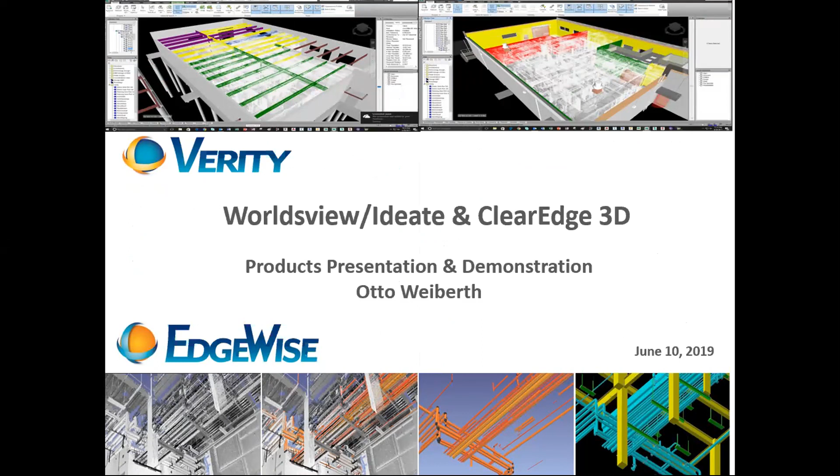Just one quick note, talking about technology. I don't know if you know this or not, but the F-16, we're talking about jets, the F-16 could fly faster going straight up than the F-4 can flying straight down. So imagine if you're sitting in an aircraft using the F-4 and you've got the F-16. So technology really becomes a big advantage.

So a little bit about ClearEdge. We're going to talk very briefly about the company, an overview, and then we're going to split the presentations into two, Edgewise and Verity, followed by a demonstration of each one.

So ClearEdge was founded in 2006 by experts in automated feature extraction. What that means is that we've been doing automation since 2006. So we truly are the pioneers. We've been doing it longer than anybody else. We have the most algorithms in automation. We are a subsidiary of Topcon, which is a $1 billion company. So we definitely have staying power. If you could hit next, please.

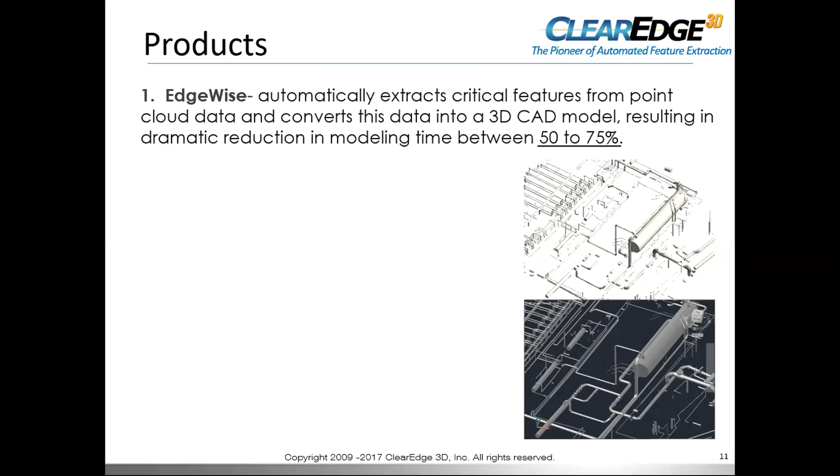Our products are typically considered an investment as opposed to an expense because there's a very fast payback. Edgewise automatically extracts critical features from your point cloud data and converts it automatically into a 3D CAD model that will reduce your modeling time by 50 to 75%.

It's easy to use. It's compatible with all terrestrial scanners, and you can easily integrate with Revit and various CAD programs. The workflow is here: you scan, you register with whatever software you're using for registration, then you use Edgewise to process it, and then you can export the 3D model that Edgewise extracts into various CAD or Revit software.

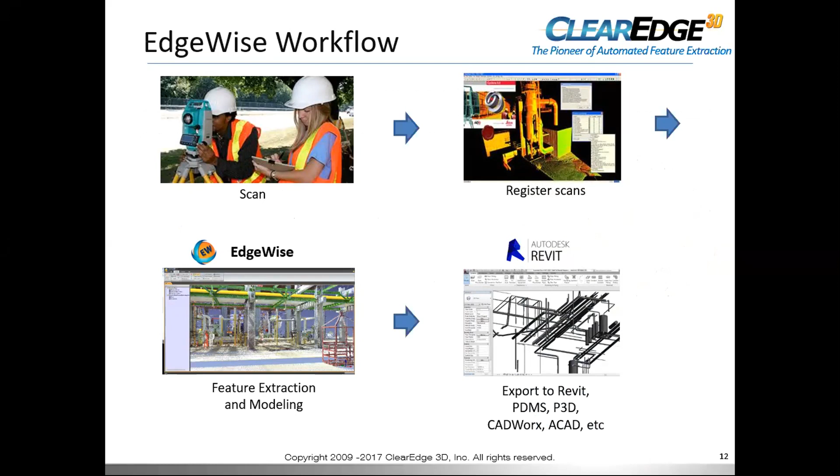On the Verity side, we'll get into that after the Edgewise, but Verity is a construction verification software, and it analyzes point clouds of your as-built installed construction against the design fabrication model. So basically what it's doing is it's looking at the two and it's showing you any items that are out of tolerance, and it's giving you a heat map so you could very quickly see it, as well as tabular data. So it's very effective.

It's a companion to Navisworks, so if you have Navisworks, it works with it. And the key factor is it can verify 100% of your work in the same time it takes today for contractors to spot check a small percentage of the project.

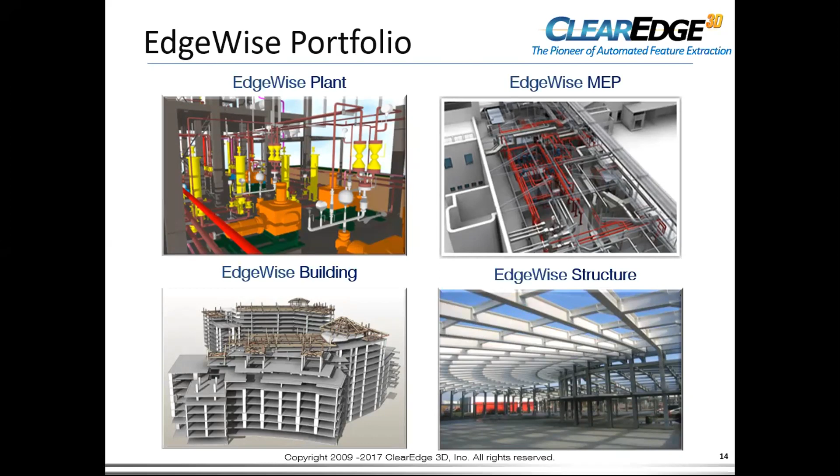Getting back to Edgewise, this is our portfolio, 4 modules. The building structure is pretty obvious. The difference between Plant and MEP, they have similar functionality. Plant is for the different CAD programs, and MEP is specifically for Revit.

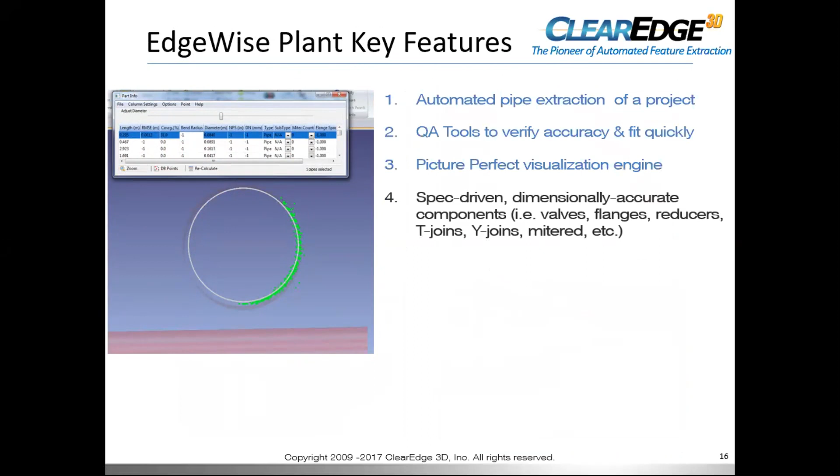On the plant side, it automates pipe extraction of a project. We have phenomenal quality assurance tools, so you can very quickly verify what was extracted automatically. We've got a picture-perfect visualization engine, which we'll show you. The software is spec-driven, so everything that you place in the software has dimensionally correct, accurate information. You could easily create custom specs because the software sits in a spreadsheet.

Next. We have both automatic and semi-automatic pipe editing tools, and our Smart Sheet technology allows you to add intelligence to every single pipe run. And that intelligent model, you could export to various CAD programs.

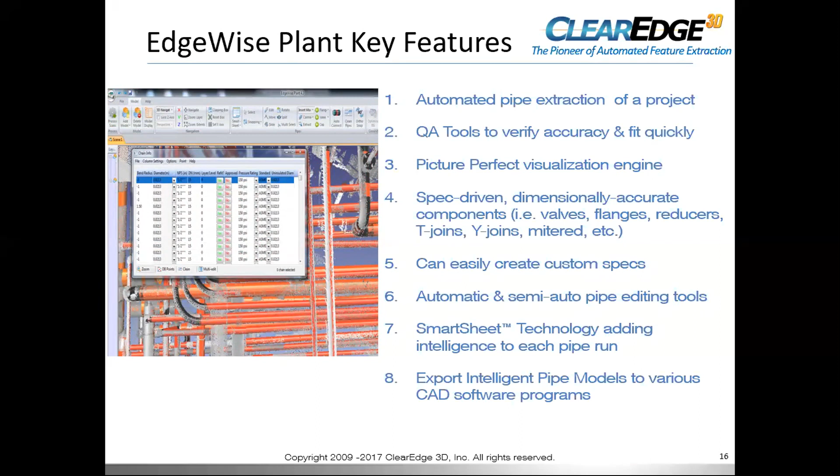And the CAD programs that we support today are CADWorx from Intergraph, Plant 3D from AutoCAD, AVEVA's PDMS, AutoPlant, which is a Bentley program, and then we have the generic Revit, AutoCAD, as well as MicroStation. So those are the plugins that we support.

A little bit about the savings. Here's a project that was done in Algeria, a large refinery, and I brought refinery because I know some of the countries have some large refineries. This one was a $2.6 billion upgrade. It was done in 3 phases. The documentation was either outdated or missing.

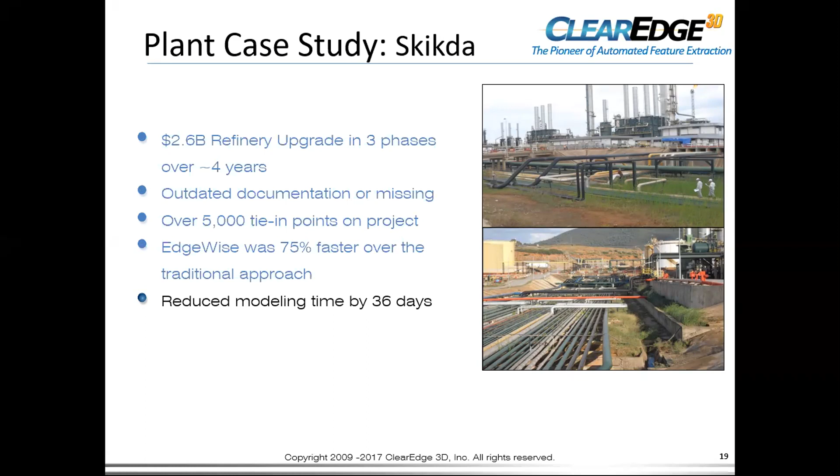It represented over 5,000 tie-in points, and because it was done in 3 phases, they had a comparison. Phase 1 and 2 were done traditionally. Phase 3 was done using Edgewise, and they found Edgewise was 75% faster than the traditional approach. In essence, it reduced modeling time by 36 days, which was substantial. If you put man hours against that, it's quite a sum of money that was saved.

It was a successful win-win project because our contractor, next please, our contractor actually reduced his modeling man hours by 75%, and the client saved 36 days of project schedule. So they got the contractors off site 36 days sooner.

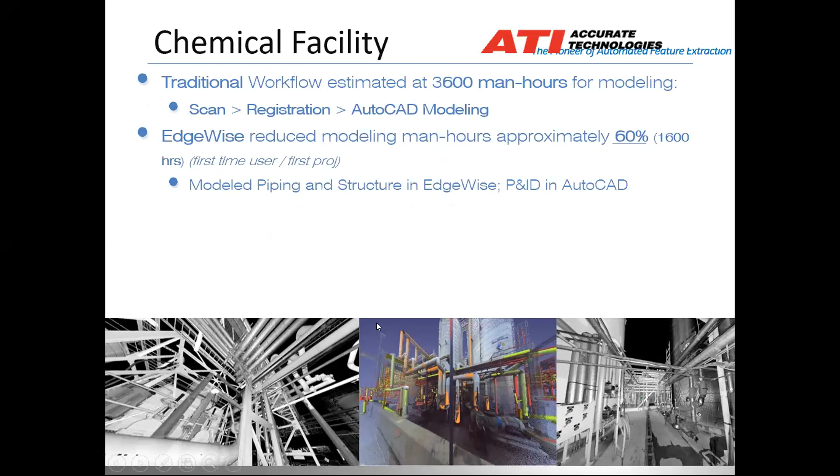Okay, next. They estimated 3,600 man hours for scan registration and the modeling itself. What Edgewise did was it reduced the man hours by 60%. So basically that 3,600 became 1,600, and they completed the modeling of the piping and the structure in Edgewise and a P&ID in AutoCAD. So that is a 2,000 man-hour savings, which is considerable on this project. So you could imagine how happy the client was. Next.

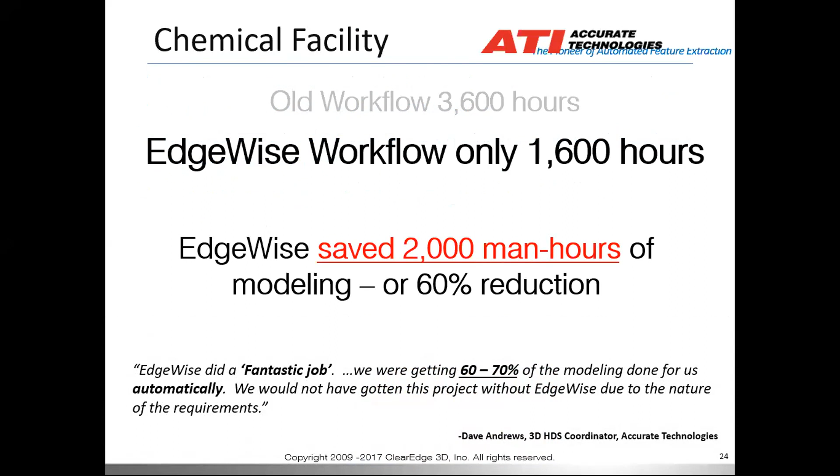On the MEP side, next. It's very similar to the plant, except it's specifically made for Revit. Okay, you could go through this. We do have a case study next, where we'd like to show you some of the metrics.

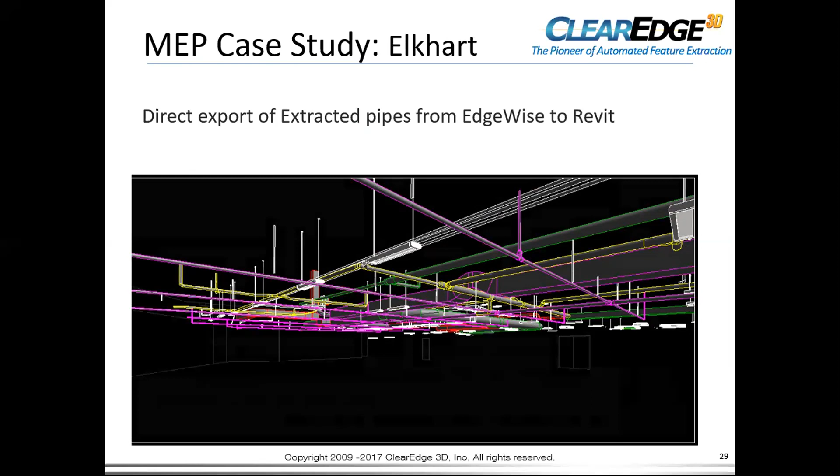Next, it was a win-win outcome because our client that did the scanning and modeling reduced his man hours by 75%. The hospital was extremely happy because they got contractors out of the hospital 11 weeks sooner. So it was truly a win-win.

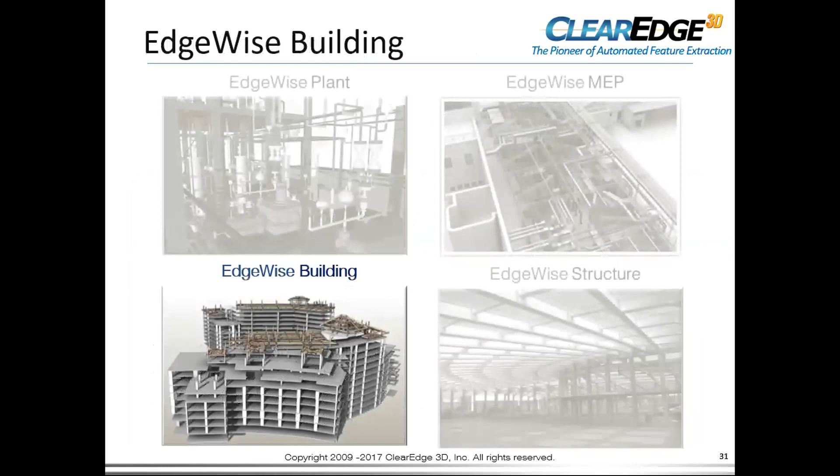On the building side, next. We automatically extract walls and windows, and we directly export to Revit as Revit family objects. And we're getting exact as-built walls as opposed to as-designed walls. And you'll see we've got a really nice QA program so you can see how the walls line up.

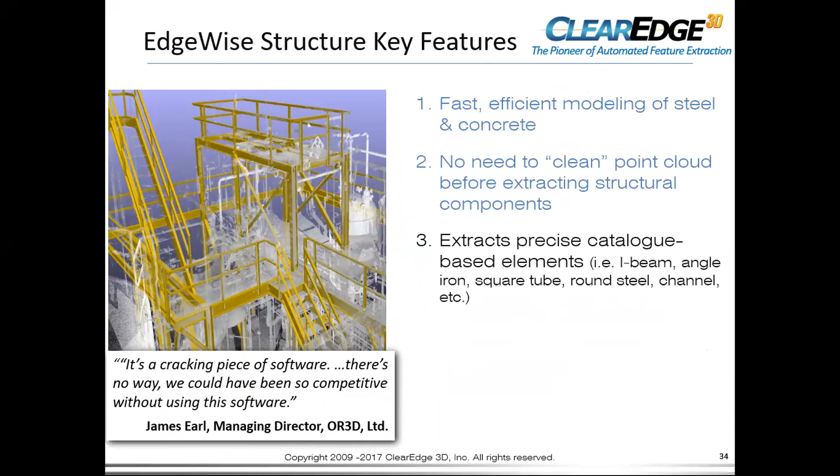Next. On the structural side, we actually can extract steel and concrete. And you don't need to clean the point cloud at all in order to extract because we're extracting from a catalog. So everything comes out of a catalog when it's extracting the steel. Next.

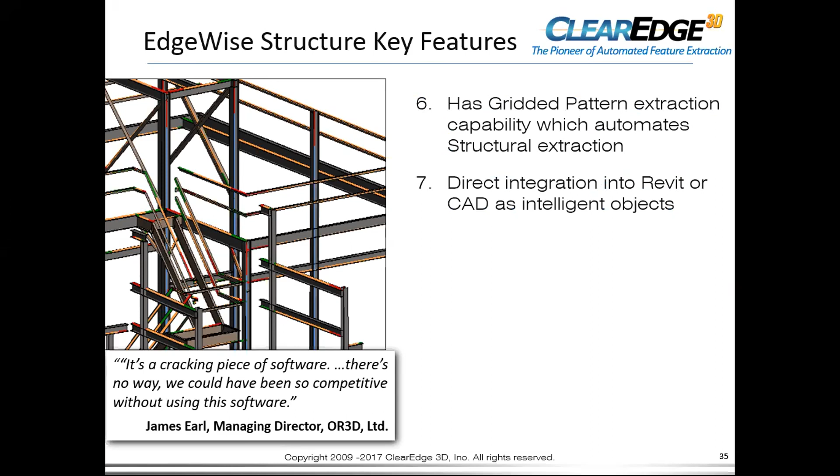We have a very good QA system and editing tools, which we've gotten a lot of feedback from clients on how well it works, and we'll show you how that works. You can very quickly see how the two line up: the point cloud that was a scan and what was extracted out of the catalog. We also have a gridded pattern extraction, which automates structural extraction. And again, we have direct integration into either Revit or one of the CAD programs.

In this case, I'd like to turn it over to Trevor. And before we get into Verity, Trevor's going to take us through a demo of Edgewise. So again, if you have questions, now's the time to ask on anything I presented. If not, you could also ask questions as we go through the demo. So with this, I'll turn it over to Trevor. And while we're turning it over, does anybody have any questions?

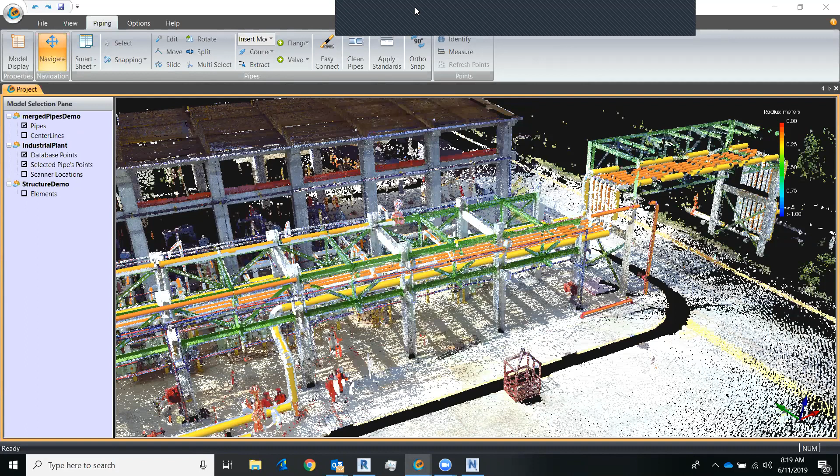All right, Trevor? So first things first, a little bit about what I have up on screen. This project right here is about 20 scan setups. All I've done to this point is I took my registered scan files, brought those into Edgewise, told Edgewise to go through, create my point cloud, and also go through and extract my pipes. So if I turn off my point cloud, all the pipes that you're going to be seeing up on screen here in a second, this is all automatically generated.

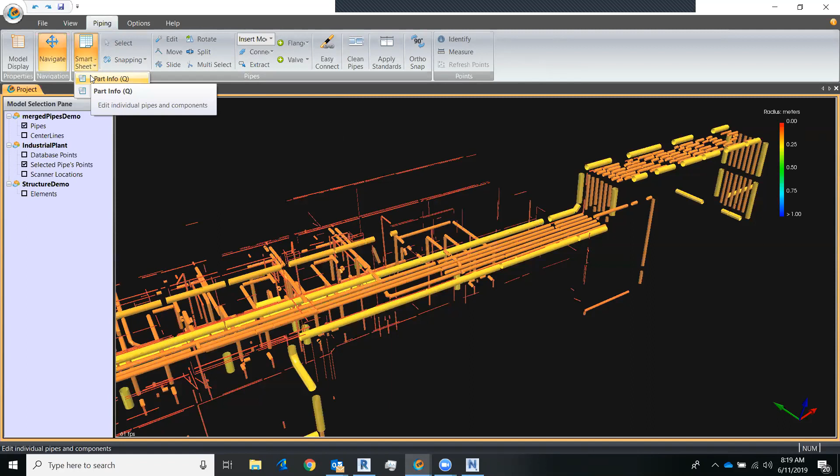So this is with no human effort whatsoever. This is the software finding them right off the bat from the point cloud. So this is going to be the starting point of my workflow, or my 0 man-hour mark. So the first thing I want to talk about today is going to be the QA/QC tools. For that, we put a lot of time and effort into developing some pretty awesome ones, mainly our part info spreadsheet, which is an intelligent spreadsheet that links my numerical data back to my visual model.

Coming back to that concept of QA, I have the QA mode. Inside the QA mode, I have the bore of the extracted pipe in kind of this teal/green, or I have the bore of the extracted pipe in gray, and then I have all the points used to extract that pipe in this teal/green. So this way I can quickly go through and visually do an inspection of my pipes, see how they're fitting to the point cloud.

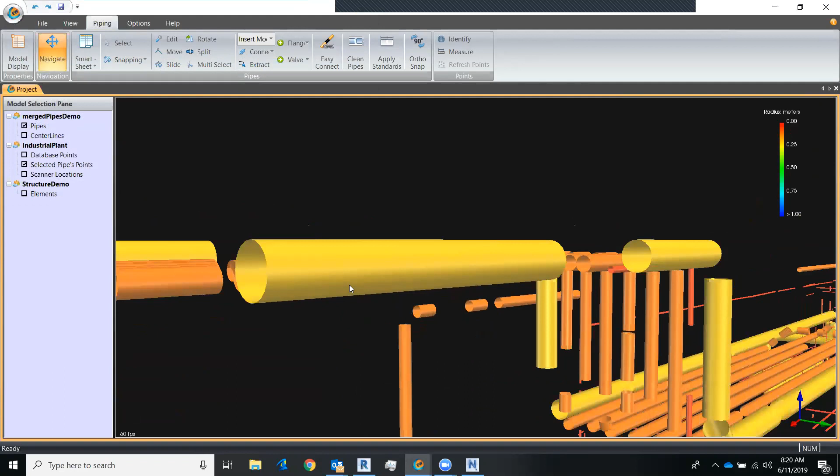If I see anything that I don't like, I can simply hit the delete key on the keyboard and I'll delete that pipe from my visual model. The next thing I'll go ahead and talk about is gaps. So for example, if I come over here and turn on my point cloud, we can see we had these structural support pieces of steel, and they blocked the scan coverage of the pipes behind them. And without any scan coverage, Edgewise simply does not know a pipe should be there.

So instead of having to go through and do these connections one by one manually, what I have is the Easy Connect tool. And the Easy Connect tool is where Edgewise will automatically go through and insert both straight connections as well as elbows. So there you can see in black, that's everything that it just did right there. That was live, and that's how long it took.

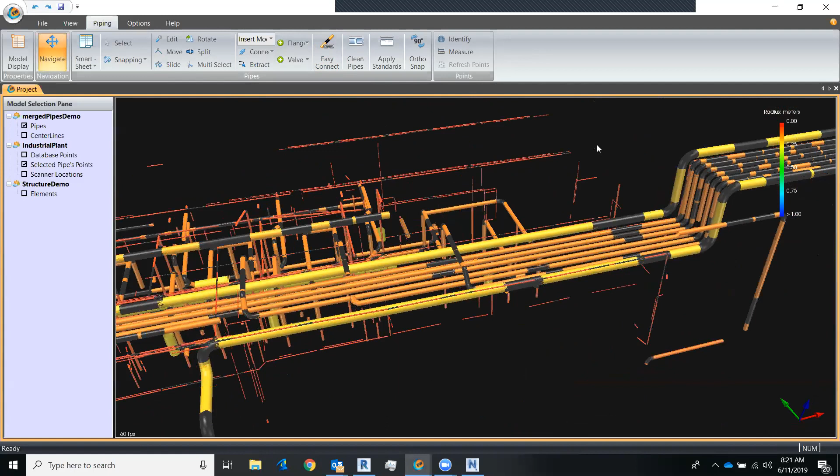So besides the automated tools, there is a whole host of semi-automated tools for inserting straight connections as well as doing pipes in a more manual way. But just in the interest of time, I'm going to go ahead and skip those. So coming back to more of the automated tools, another of the unique tools in the Edgewise software is going to be this one right here, the Clean Pipes tool.

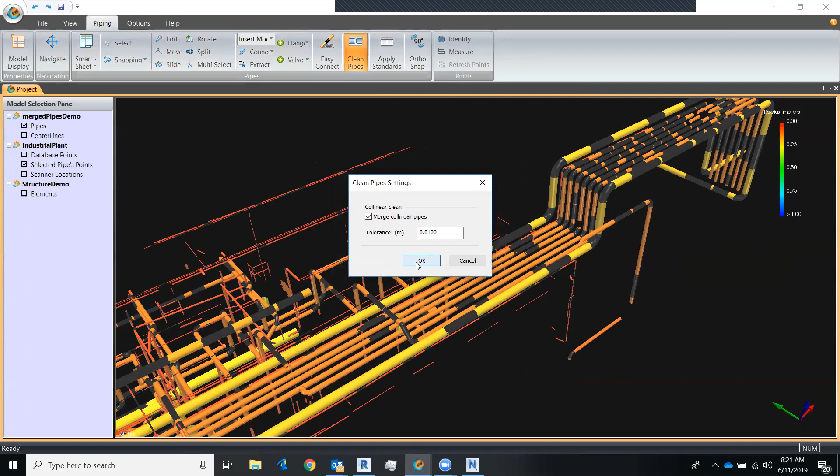So the Clean Pipes tool is incredibly important because it does two main things to my model. It'll convert these black straight connections and turn those into true pipe, and also gives me the ability to control how as-built or how as-designed my model will be. What I mean by that is I can choose to either make more straight perfect pipes, or I can have the option to make a pipe that more accurately reflects the as-built condition.

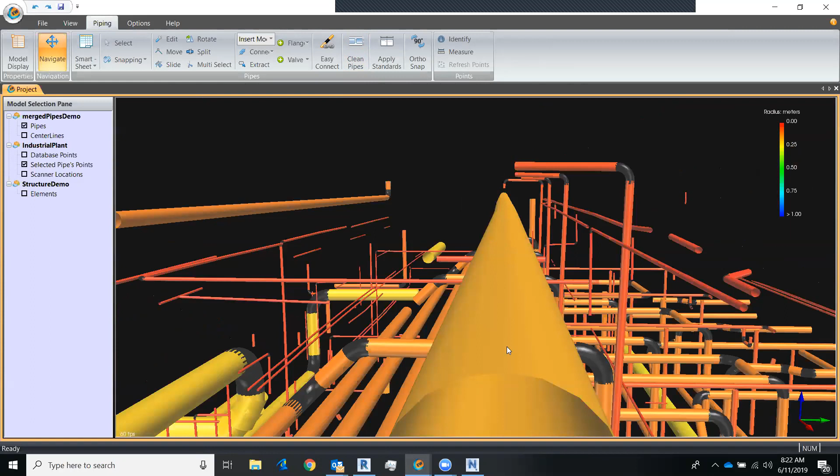It might be a little bit hard to see, but if you look around this pipe right here, you can see it meanders a little bit to the left. It kind of swings back to the right. So again, my as-built conditions like the sags and deviations are being captured in my model. And as I mentioned, I have the ability to either straighten that back out, or I can have it capture more reality, completely dependent on the needs of the project.

So the next thing we'll go ahead and talk about is applying a standard to the model. For that, right here, we have this pipe standard editor. I'll just go ahead and click on, say, my ASME spec at 150 PSI, and there you can see all the different values contained for my pipes, my flanges in the center, and all the way to the right, my different valves. The reason I point this out is I have the option to export this out as a CSV file that I can bring into Excel and use as a template to create my own custom spec for use in the Edgewise software.

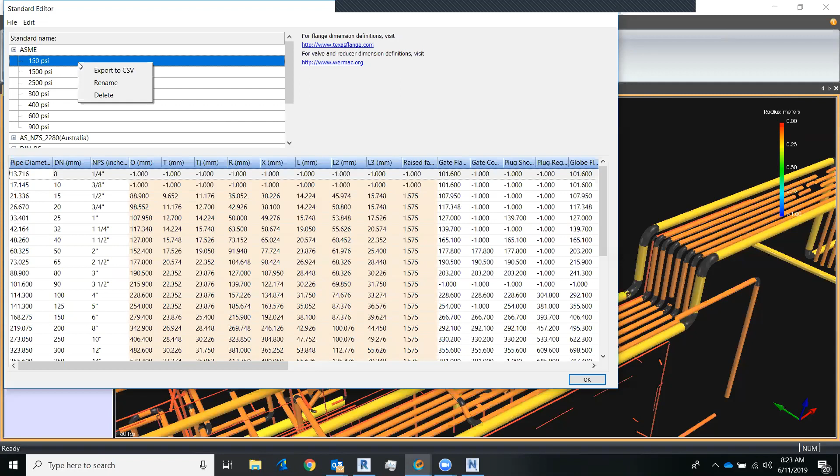Speaking of that, I can apply a standard to my model in one of two ways. There is a global option that will allow me to apply a standard to the model globally, as well as an option to do it by pipe run or for groups of pipe runs. I'm going to show it mainly as a global operation, and that's going to be the Apply Standards tool right here. So I'll go ahead and click that. I'll just go with my ASME spec at 150 PSI, click OK. There's a slight shift in the models. Now Edgewise takes the diameter that I found from the scan data and matches that up to the closest standard spec diameter.

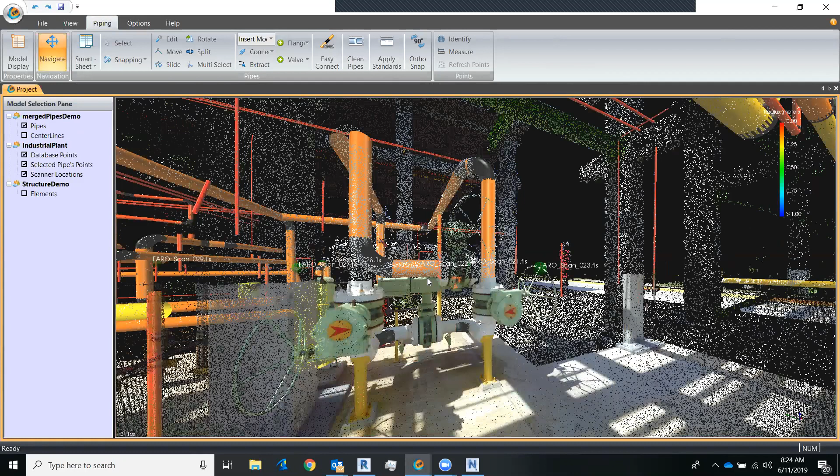So now that I have my standard applied, this is where we can go ahead and talk a little bit about components. And one of the key tools I have for my components is going to be something called ClearView. ClearView is a photorealistic rendering of the point cloud from a scanner view. So if I hop into one of my little scanner orbs and turn on my point cloud, you'll see I'll be presented with this kind of HD photo view.

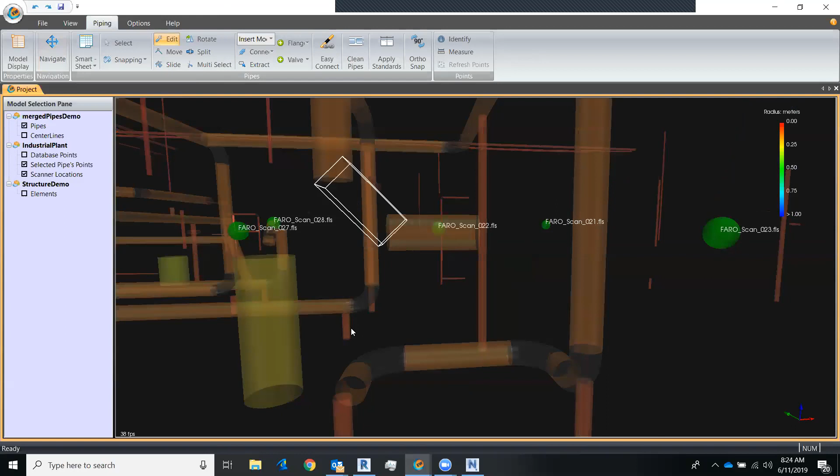So the key thing is this is all a point cloud, meaning all of the modeling I have shown and will show I can do from this view. And this is one of the most important tools I have for my component placement. So I'm just going to go ahead, clean up this little section right here. I'm going to use some of my semi-automated tools.

There you can see I'm inserting elbows. I'll put some T-joints over here on the left and right. And now I'll go ahead and place some components. Before that, we have two big drop-down menus, a list of all the various components inside the Edgewise software. So I'm quite literally just going to choose a flange gate at random, and that's going to be a click and drop. So I'll turn my point cloud back on, left click and place along the pipe.

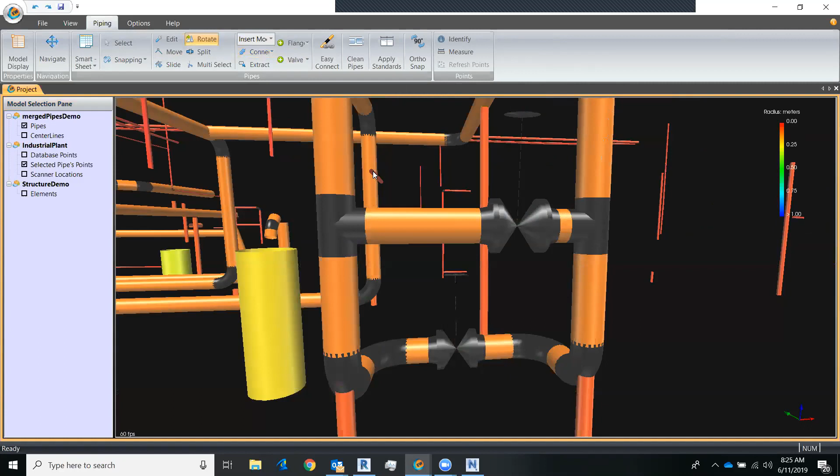There you can see I now have my valves in place. Once I do that, I then have this rotate tool where I can left click and drag, rotate these around, and again, visually fit them to the point cloud. So that is component placement. Again, click and drop it over to the point cloud.

Right. Now I'll go ahead and get out of my ClearView, and let's go ahead and talk about the last thing, which is going to be the chain info spreadsheet. So the chain info spreadsheet right here allows me to manage the intelligence relating to my full pipe run, including diameter information, any layers and levels if I was going into AutoCAD, as well as pressure rating and standard information, and the

Revit families. So if we're focusing a little bit on a Revit workflow, when I export from Edgewise into Revit, I can choose one of 3 families. I can go pipe, conduit, and duct. So this will ensure it'll come into Revit under that correct family database. I also have a multi-edit tool down there at the bottom.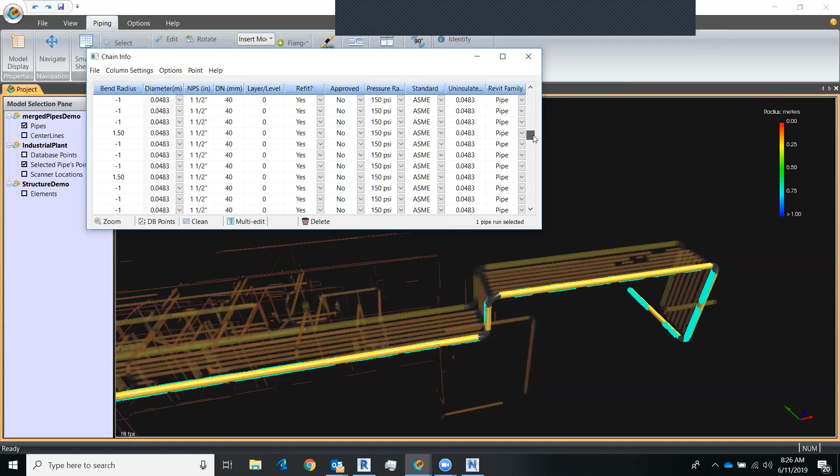Multi-edit does exactly what the name says, and I could say, group select a bunch of these little guys. So I'm going to go ahead and grab everything below 40 mil. You can see it's highlighted in the background. I'll then go multi-edit, go to my Revit families, go to conduit, and now this will all change over to Revit family conduit here in a second. And so again, this will ensure it'll come into Revit under that correct family database.

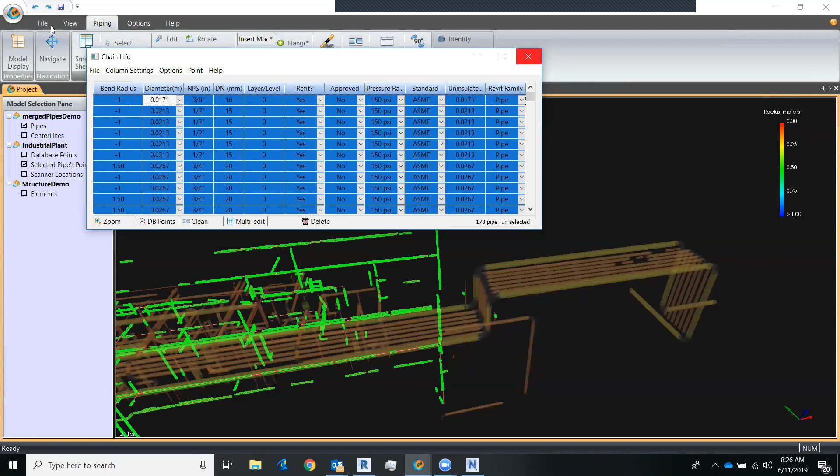So speaking of the last bit, which is going to be the exports. So there's a couple different exports. We're going into the various CAD applications as well as going into Revit. So for going into programs like Plant 3D, as well as CADWorx, we do have intelligent exports. And that's going to be right here. So we offer a couple more intelligent formats.

Additionally to the geometry, there is also a couple point cloud exports. So this one right here, this is the remainder cloud. The remainder cloud is unique, and that is an export of all the remaining point cloud data that still needs to be modeled outside of the Edgewise software. That way you're not having to deal with the information you've already worked with, but you can purely deal with the data that still needs to be worked with inside of, say, Revit.

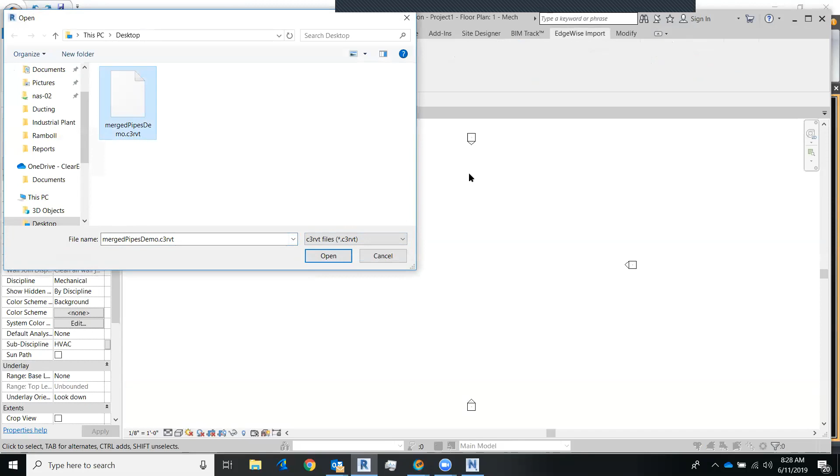So for Revit, I'm going to pop this out. We actually have our own custom plugin. And so just like with all the other things with the Edgewise software, when I pop this out from Edgewise into Revit, it'll all come in as true Revit family objects with all the intelligence behind it. So I'll go ahead, inside of Revit, I just have a brand new project open, and I'll import this in, and so everything will come in from Edgewise into Revit.

Also, the other thing to mention is the coordinate system. Edgewise will use and export all geometry to whatever coordinates are assigned in the registration process. So that was my model, my different disciplines. I can bring those into Revit, one on top of the other, and then everything will come in correctly aligned inside of Revit.

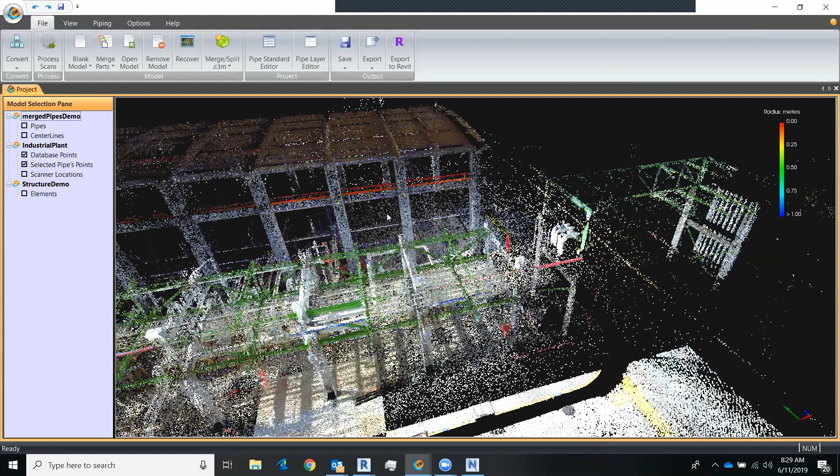And that is a kind of a crash course, if you will, in the piping side of things. So next up, we have the structural steel. The structural steel operates off of a little bit different of an engine, and that engine is object detection. So what that means from a practical standpoint is the automation, instead of happening at the beginning of my process, more happens towards the end.

So I've already created a couple little structural steel elements. I'll kind of talk a little bit about how I got to that point. So the centerpiece is this extraction tool right here. Works exactly the same as with the pipe, and I can draw a box around my element and then Edgewise pull it out. Unique to structure is these 3 drop-down menus right here.

First one is the catalog. These are all the different steel catalogs we have contained inside the Edgewise software, as well as there's catalogs for doing, say, concrete and wood. Quick note, those catalogs are completely customizable. So if you do have your own custom steel sizes, it's a really quick process to add them in.

Next up, there's a type. So there's I-beams, round tubing, channel, angle iron, tubes, and T's, as well as cylindrical and rectangular concrete, and rectangular wood beams, and lastly, the size. There's the auto fit, as well as all the various sizes contained in my catalog.

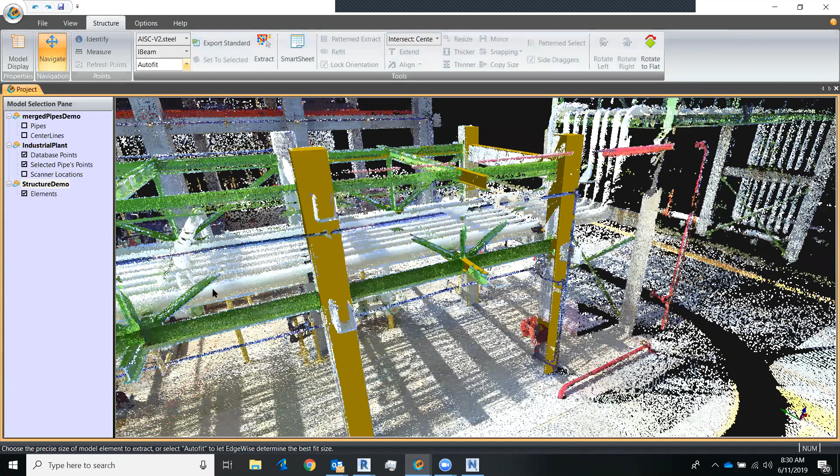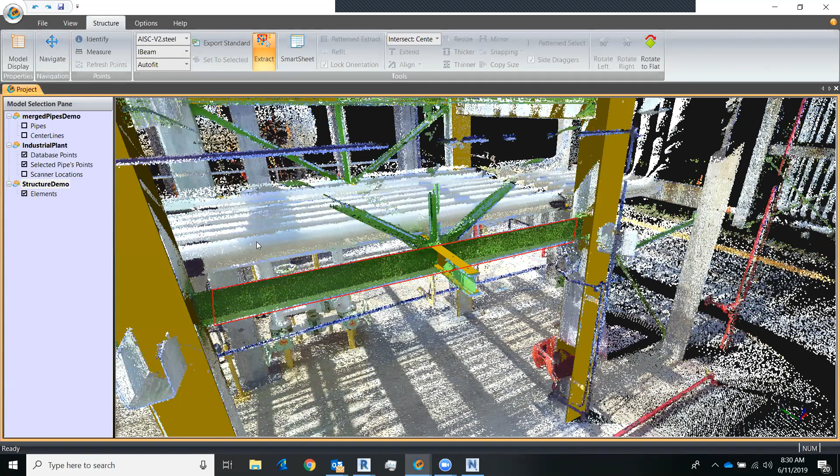So to pull out this first piece of structural steel, click extract. I'm going to go ahead, draw a box around the point cloud data that makes up this element. Double left click in quick succession, give it a sec, and it's going to browse my steel catalog and then choose from that catalog that element size that best fits. And all that happens in about half a second. And there you can see my first piece of steel.

So coming back to that very important concept of QA, what I have is the smart sheet. And in there, I have two things. I have the spreadsheet over here on the right, which contains all my numerics. So I can see all the length information, what catalog this came from, as well as the size. And over here on the left, I have the 2D view. Inside the 2D view, I have this outline of my steel that I can left click and drag to manipulate. And any manipulations I do in the 2D view will be mirrored in the 3D view and vice versa.

Just for demonstration's sake, I'm going to go ahead and change the size to something wildly incorrect. There we go. So if I do have an incorrect extraction, I have a resize tool where I can quickly come through, left click and drag in the 2D view like so, and then Edgewise will instantly try to resize that element to the closest catalog size. So again, even if I do have an incorrect one, it takes me about half a second to adjust it.

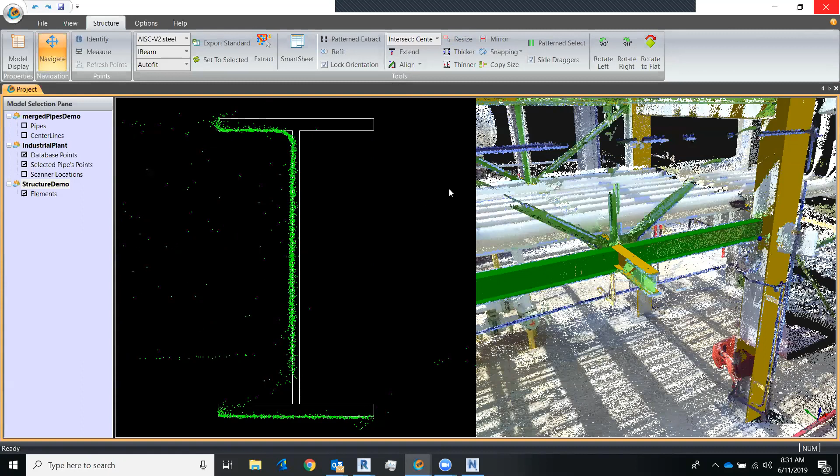So now that I've gone through, I've QA/QC'd this element, I've gotten the correct size, I can take advantage of the fact that structural steel sizes in a project are often repeated. And that's using this little tool right here called Set to Selected. That'll put a true size where my AutoFit once was, and now I can go into areas where I might have poor quality scan data. Edgewise knows the size. It'll simply take what I want and fit it to the cloud. Makes the extraction algorithm a lot more robust.

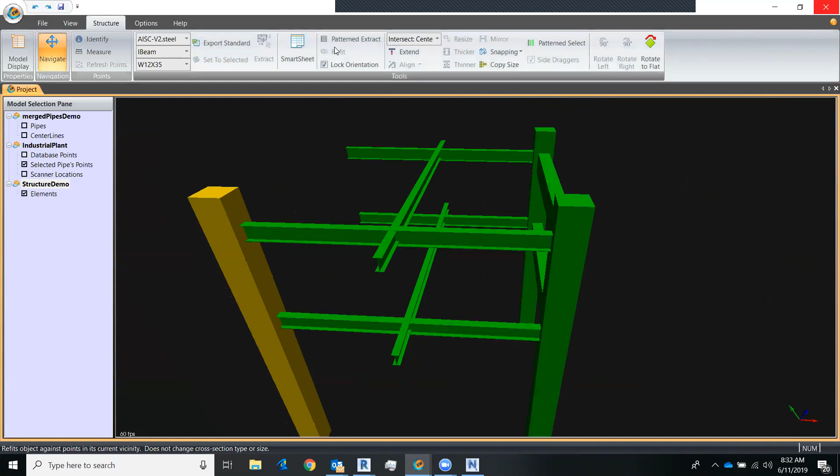Next up, Extend Tool. Extend Tool does exactly what the name says. It allows me to extend over and kind of build a section. And the keyword is, now that I have that section built, this is where I can bring in the automation. So the automation comes in the form of this Patterned Extract tool.

What the Patterned Extract tool is and how it works is I can define a grouping of elements. So in my case, everything I have selected in green. I then can define a direction and a spacing. And what will happen is the software will go out to the point cloud at that set direction and at that set spacing, looking for all the elements that I have selected. If it finds that element in the point cloud, it'll do an extraction, and so it's going to do a true mass extraction, fitting each and every element to the point cloud individually to get me my as-built conditions.

A very simple way to think about it is kind of like an array tool, except instead of just doing a blind array, it leverages the point cloud data to get individualized fits. And that is kind of where the automation with the structural steel portion comes in. So we're going to go ahead and let this run for a little bit longer, and then we'll, oh, you know it's done.

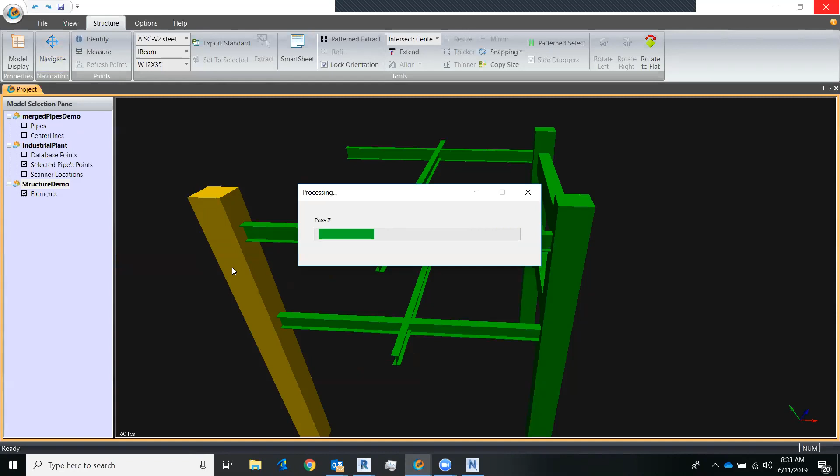So there you can see everything right there. Again, going through the point cloud and fitting each one of these elements. And that fit is extremely important because, again, they're not going to be perfect, for lack of better words. So each one of the spacings will be off, the orientations. Again, that's going to accurately represent the conditions of your model in the point cloud.

Just like with the pipes, I can pop these out to a variety of applications. But for today, I'm going to go ahead and focus on popping this out to Revit. So I'll save this to my desktop right here. Looks like our pipes are done. Oops, where'd you go, Revit? So I'm going to go ahead and bring my structural steel on top of my piping. So I'll go ahead and do that.

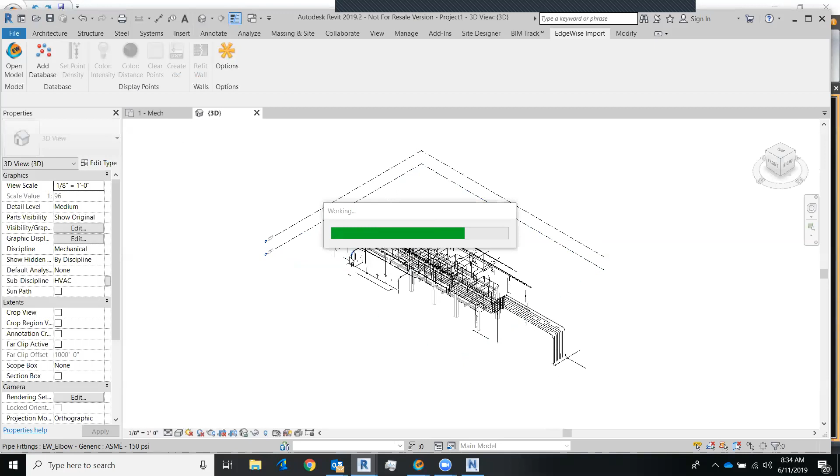So again, this will bring in my structural steel. Everything will come in as full Revit family objects. So all the intelligence, everything will be there. So at this point, once I have everything from Edgewise into Revit, there's no link saved back to the Edgewise software. So I can save this out as a Revit project, hand it over to the engineers, the architects, the detailers, and they can go ahead and finish it off.

So I'm going to go ahead. Let's take a look at all of this. So there you can see I have my different pieces of structural steel. Piece of right there. I can select the pipe in the background. Again, all this is true Revit family objects. I can swap it out if I have a specific family that I want for my project. But at this point, again, I can hand it over to the engineers, the architects, the detailers, and they can finish it off from here. All right.

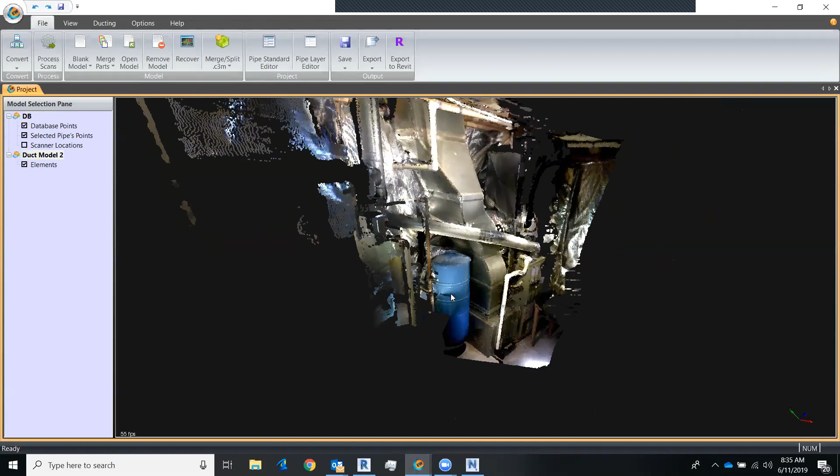So next one real quick is the ducting portion. The ducting portion operates very similar to the structural steel, and that's that same object detection engine. So the key part with the ducting is that if I can extract out my straights, Edgewise will allow me to kind of automatically do my transitions as well as my elbows. Additionally, the other key part is that any complex geometry, if I can break that down into what Edgewise can do, then it's fair game for modeling. So I'm going to break down that S shape in the back into two radius elbows connected by a little straight.

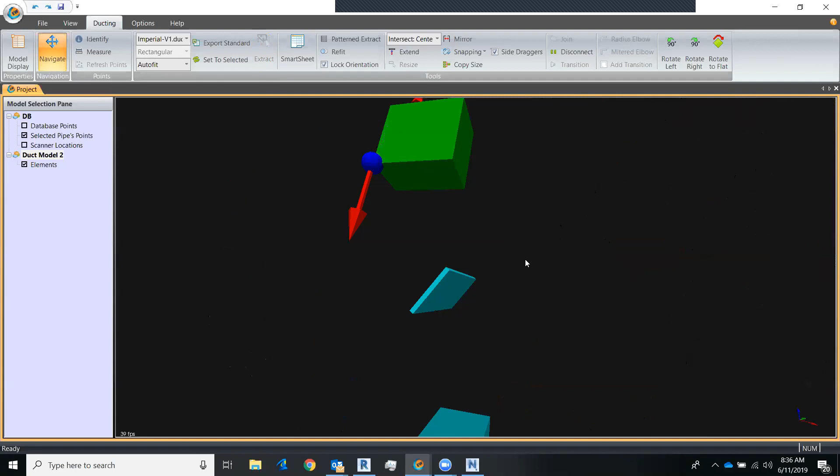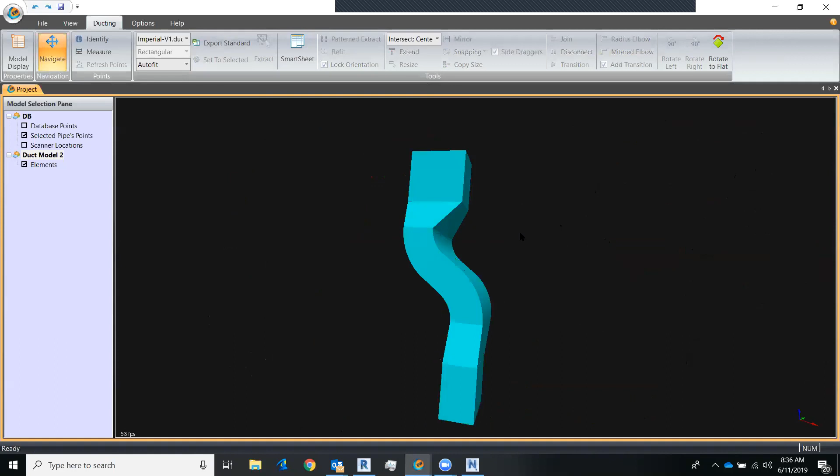So now that I have my straights extracted, I can then use my snapping tools to go ahead and align this. And now that I've done that, I can grab two pieces of duct, come over here to my connections, do an add transition with the radius elbow, and there you can see I can start creating my run. Once I have that rough fit, I can go ahead and click on one of these pieces. I have these large manipulator arrows where I can left click and drag and size this to the point. And perfect. So that was done in less than a minute. And again, all this can be exported into Revit as those true Revit family objects.

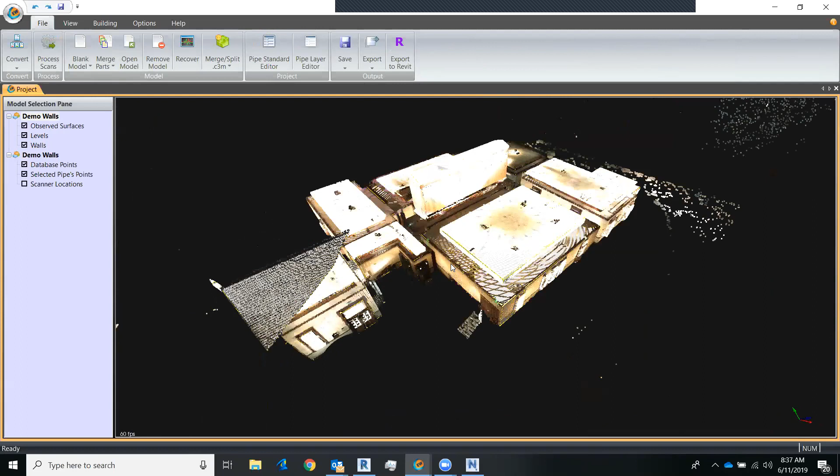Last but not least is the architectural side. So the architectural side, again, is more similar to the piping with the automation, in that our starting point is the planar model. The planar model is all automatically generated right here. And what I can do to begin my workflow is use my pick level tool to isolate my various floor and ceiling heights like so. Once I have that done, I can then use the find walls tool, and this is where Edgewise will automatically go through and extract out my walls. And there are my walls. So again, that was all live.

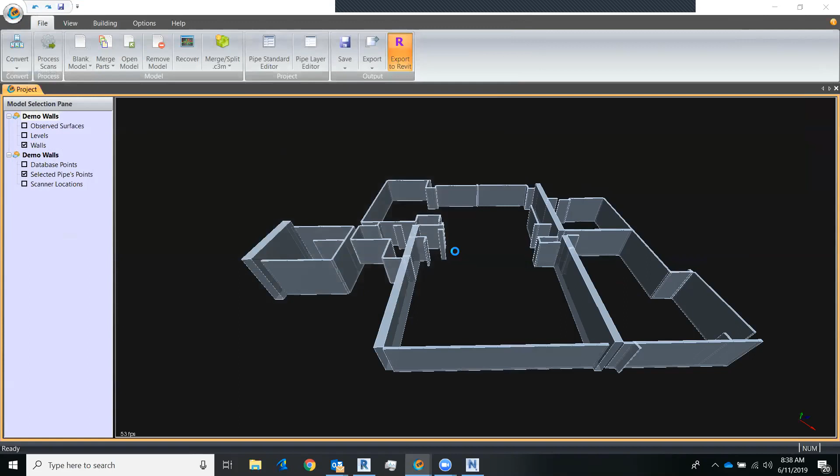Pretty much it allows me to generate extremely flat, fast, accurate floor plans that I can then bring over into Revit. Speaking of that, I'm going to go ahead and pop this out real fast. We can take a look at the plugin side inside of Revit. Unique to the architectural side is that in addition to writing out the geometry, it also writes out the point cloud data associated with that geometry.

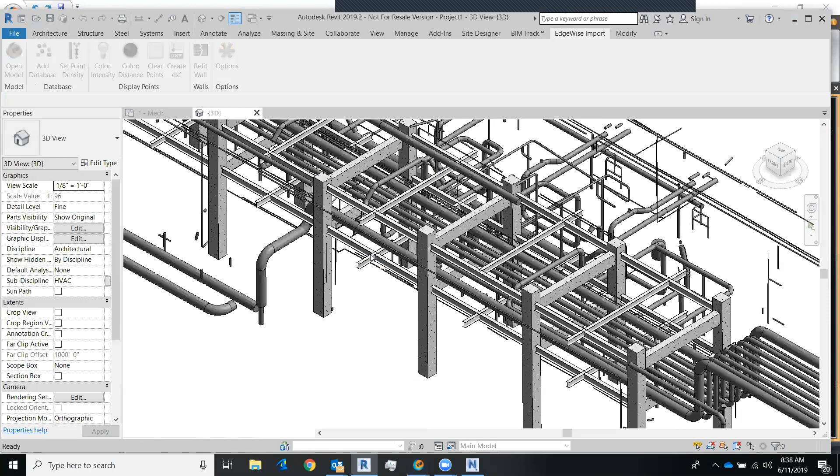So that way, when it comes into Revit, it'll come in as designed: perfectly plumb and square, perfect walls. Using the plugin, I can display the point cloud data on the wall to show me how my perfect wall is deviating from my as-built conditions. Then using the Edgewise plugin, I have the option to refit that wall back to the point cloud to get me my as-builts. So now that I've talked about it, let me go ahead and show this.

Just like we've done previously, I'll go ahead and bring the walls in. One quick note on the wall thickness: if Edgewise has both the inside and outside point cloud data, we'll try to extract the wall to the true thickness. If it only has one set, it'll extract to the Revit default, which is 5 inches in imperial. All right, so there are my walls. I'll go ahead and link my point cloud database right here.

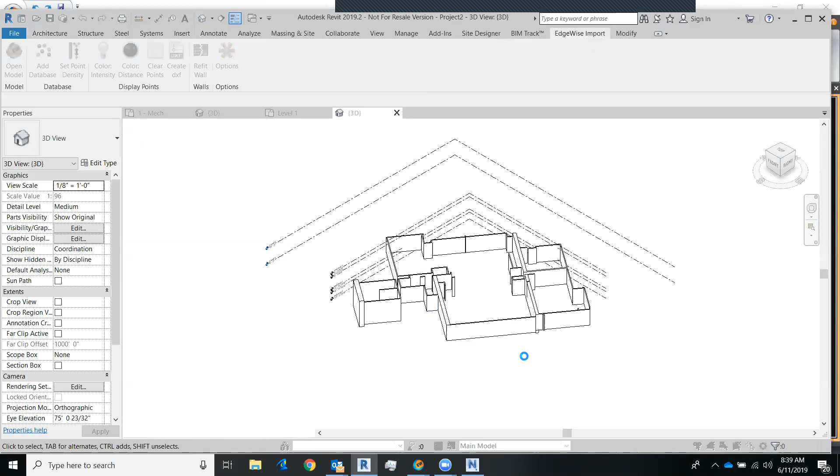My database is linked. So we can see it a little better, I'm going to change over to a wireframe view. I can click on a wall, do, for example, a color by distance, and there you can see my heat map. Green is good, yellow is points that are too close to my wall, blue is points that are too far away. So I can go through one by one, and this is where I have the refit wall, where I can choose how I want to refit my wall back to the cloud. The original wall is going to be my perfect design wall.

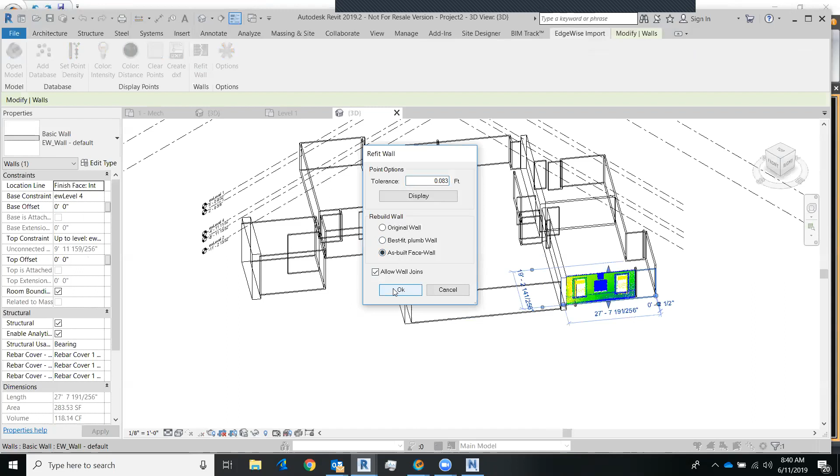Best fit plumb keeps the wall perfectly vertical, but wiggles it to best fit to the cloud. The as-built face will do that, but in addition create a rectangular mass object that's the same size as that wall, and that rectangular mass is how it gets the vertical slant. So I can do that, do a color by distance to see the updated fit, and there we go, that's looking a lot better. So that is the building module, and that wraps up the Edgewise software, again more of a high level overview. So Otto, I'll turn it back to you, and we can talk about the Verity side.

Just as a wrap up, thank you, Trevor. Great job. I hope everybody saw the advantages Edgewise could provide on your projects. It allows you to do more work with less people and also be competitive when you're bidding. So hopefully you'll contact your resellers and ask about how you could get involved in utilizing technology to be more competitive. Okay, I see there's a question from Becca.

Okay, just let me unmute Becca so you can chat to us and ask. Give me a sec. Hang on, I'm just trying to unmute him. Okay.

His question was, and I'm not sure if it's been answered already because I'm not the technical expert: does it process the data from GPR? If GPR is ground penetrating radar, the answer is no. Edgewise primarily deals with data coming from terrestrial tripod laser scanners.

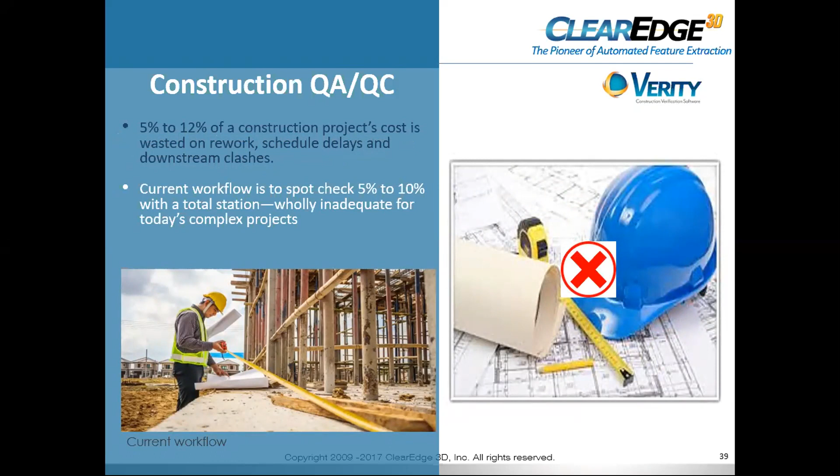For years, our current workflow is to spot check 5 to 10% with a total station or with a ruler and drawings. And with today's complex projects, it's totally not possible anymore. So with the falling prices of laser scanners, it's very feasible to do scanning during a construction site. And what Verity does is it gives you 100% of the project in the same time that you spot check it.

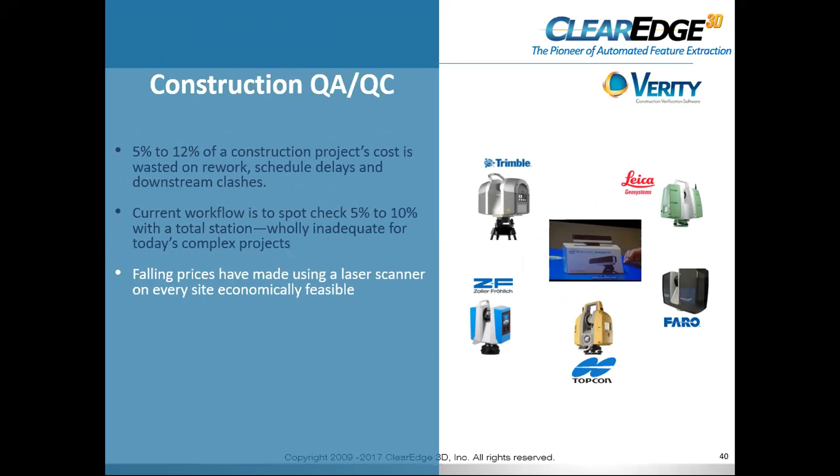So basically, you're not getting 5 or 10%. You're getting 100% of the project, and it's looking for all the errors. And the nice thing is, it's doing it in a very shortened time frame. So you're finding errors early on, because during construction, if you wait 2 weeks or 3 weeks before you find an error, it becomes a lot more costly.

Okay, next please. So what does it do? It's a companion tool with Navisworks, so you need Navisworks. It checks the accuracy of the 3D model that you have against the point cloud, and it compares the design fabrication model to your as-built. So basically, you've got a 3D design model, you scan in the field, it does a comparison, and it lets you know whether the object is there or it's not there, and also lets you know if it's out of tolerance. It gives you dimensional data as well as graphic data to show you what's out of tolerance.

And the nice thing is it allows you to adjust the model in place to an as-is condition. And then if you're doing clash detection in Navisworks, you actually have the as-is condition. So you could do true clash detection. Okay, next.

So how does it work? You load the design model in Navisworks. Next, you load the point cloud in Navisworks. Next, you identify and select objects. So if you only want the steel, you would select the steel objects. If you want only the piping, you would select the piping. If you're doing everything, you would select whatever objects you want to analyze.

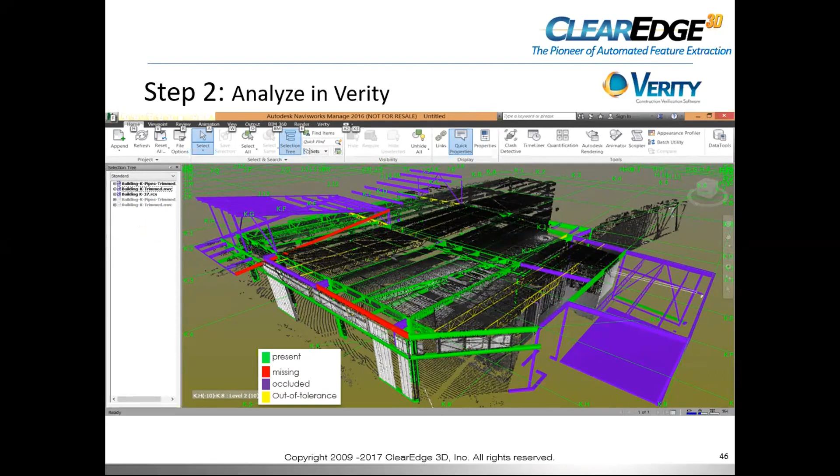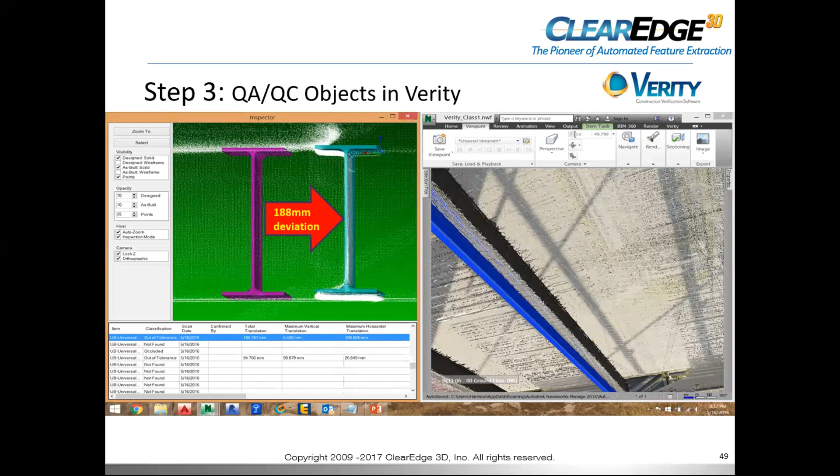And there's also a table, if you click the next thing, it shows you that there's vertical and horizontal deviations and exactly what they are by millimeter or meter or whatever unit you select. Next. And in this case, it shows you that you've got a major problem. This beam is off 188 millimeters. So if you're hitting those types of tolerances, you're going to have some design problems.

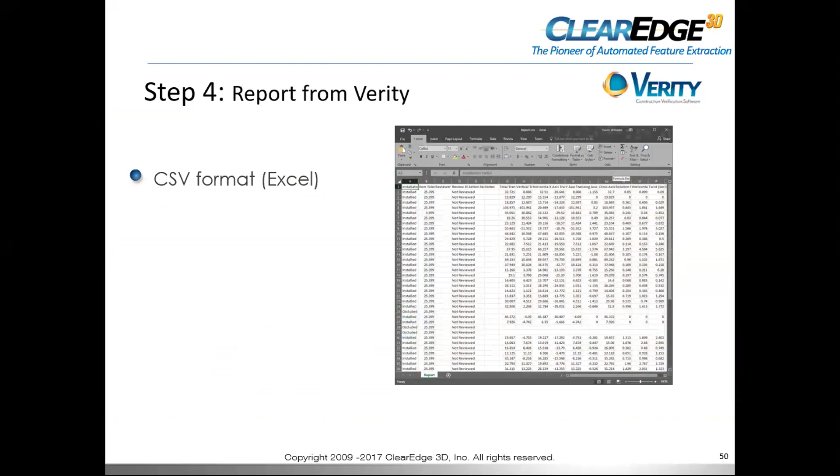Next, and the nice thing is it allows you to produce a report in either a CSV, which is an Excel sheet format. Next, it also gives you an HTML report. So the HTML shows you all the different views as well as the tabular data. You could also push the data back into Navisworks properties, and it gives you all the data inside of Navisworks.

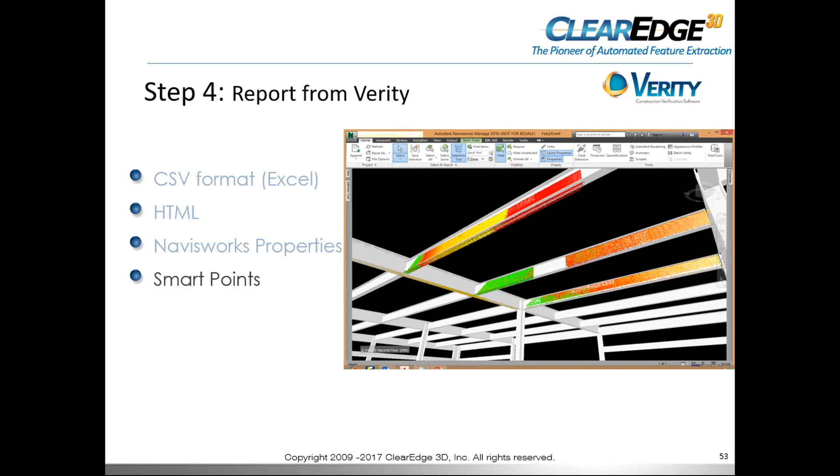And we also have something called Smart Points. Smart Points show you exactly through a heat map how the members are. For example, here you can see that in green, it meets tolerance, this piece of steel here. As you get further away, it's getting out of tolerance. And when you get in the middle, it's way out of tolerance. So basically that beam has a twist or it has a bow.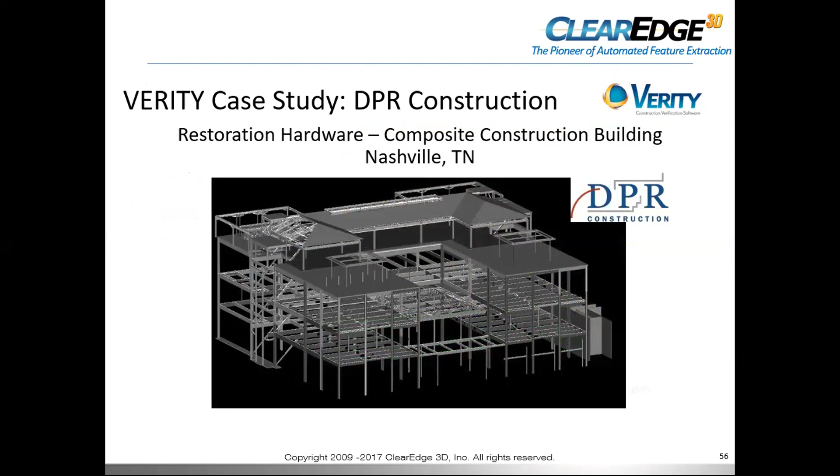Okay. Now, a case study. This is one of our clients, just to show you some of the benefits of Verity. It was a building, and their function was to review the steel structure and the slab edges. 583 steel items were analyzed, and the scanning, processing, analysis, and report generation took 16 hours in order to do 583 elements.

Next. As a result, they found more than 50% of the steel was installed incorrectly, and some of the steel was out by more than 75 millimeters out of tolerance. If you could go back one real quick, you could see it's color-coded, right? So everything in green is okay within tolerance, everything in yellow is out of tolerance, and everything in red is either way out of tolerance or it's missing.

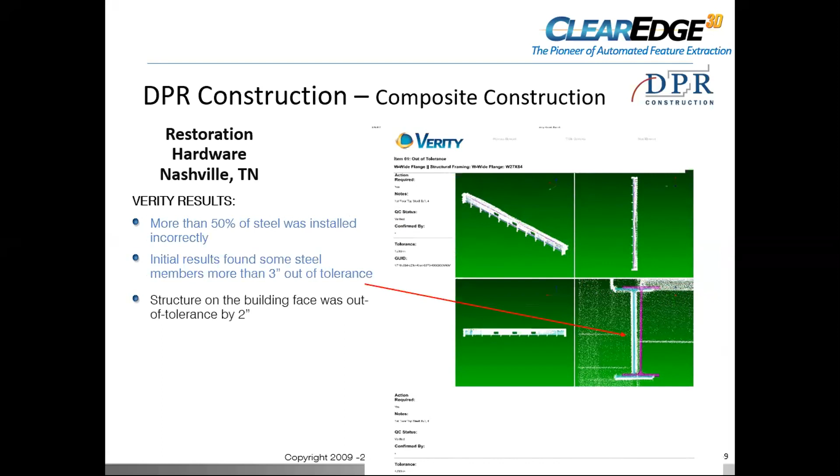Okay, next. In this case, this is interesting because the structure on the building face was out of tolerance by over 50 millimeters, so that could be a major problem. Okay, next. It also found that this beam, which is supposed to have a 10-degree slope, actually was installed straight. So if that was a roof and it expected some runoff or something like that, there was a problem.

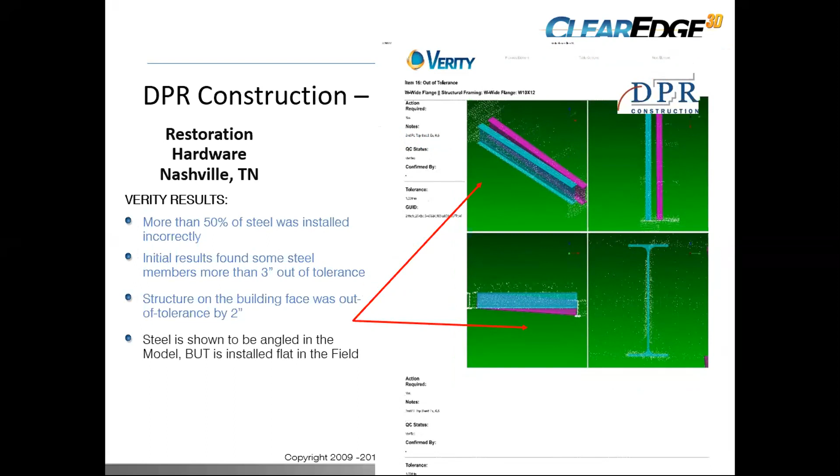In conclusion, they identified substantial installation errors, which saved a lot of rework. And they were able to fabricate true as-built steel. So basically, a lot of the steel corrections they made before it left the fabricator's office, which resulted in not having to do as many field corrections. So they were truly believers. They've used Verity on all future projects because of the phenomenal results that they had in using Verity.

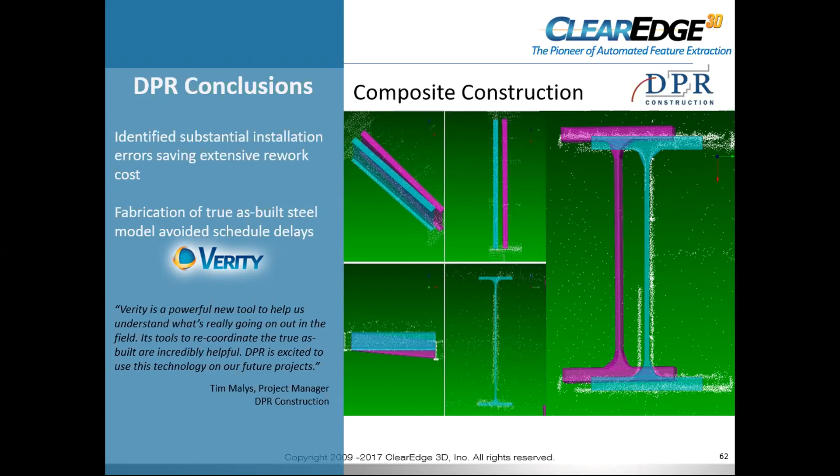And with that, I'm going to turn it over to Trevor to show us a little bit about Verity. So Trevor, it's all yours. All right, thank you, Otto.

So with the Verity software, our starting point will have our point cloud data representing our as-built conditions, and also we'll have the geometry that we want to compare all loaded into Navisworks. So that's going to be my starting point. So the first step is going to bring the geometry that I want to analyze from Navisworks over into Verity. So any way that I can go ahead and select geometry is going to be fair game.

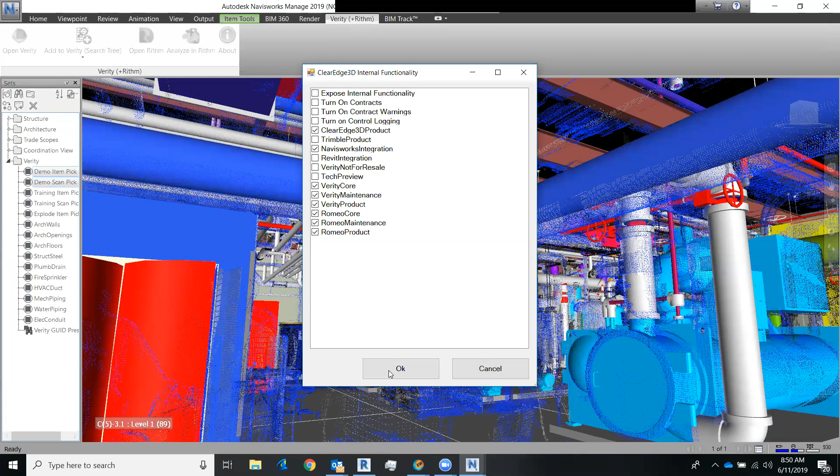Also, the other thing I'd like to take some time to stress is Verity is not a modeling application. Verity is a comparison tool. And the reason that's so important is because any kind of geometry is fair game for an analysis as long as it's present inside of Navisworks. So things like pumps, equipment, floor slabs, it does not matter. It just has to be solid geometry.

So I'll go ahead and let this run like so. Let me go ahead and open that up. And here we can take a look at the Verity application. So once I have all my geometry as well as my point cloud data loaded in, this is where I'll go ahead and use my analyze function right here. I can set my tolerance that Verity will use in comparing elements to the point cloud. And I'm going to go ahead and let this run.

So during this process, Verity is going to be doing a couple things. Number one, it's going to make a judgment call saying, hey, is this element found within the point cloud? If it's not found within the point cloud, it'll flag it as being not found. If it is found within the point cloud, it's then going to look at that tolerance value and say, hey, is this element inside of tolerance of where it should be? If it's inside of tolerance, good, great, excellent.

If it's outside of tolerance, what Verity will then do is create a copy of the geometry. That copy of the geometry, it'll refit back to the point cloud to get the as-built conditions. In addition to all of this, it also is working with the point cloud data. So what it does with that point cloud data is it will classify it around the element to generate several heat maps. And what those heat maps allow me to do is see a lot more of the subtle as-built conditions on my elements. Think of things like sags, any warping on my steel. All of those will really pop out using the heat maps.

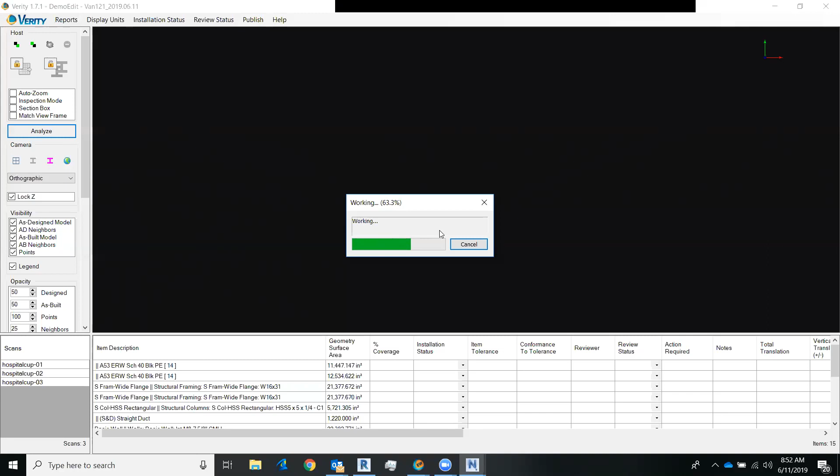And then I also have this teal element, and that teal element is the copy of the geometry Verity refit back to the point cloud to give me my as-built conditions. Down here at the bottom, I have my translation metrics. So I can see this element is about 7 inches out of tolerance in the worst spot, and it further breaks that number down into the vertical and horizontal vectors, as well as the project X and Y.

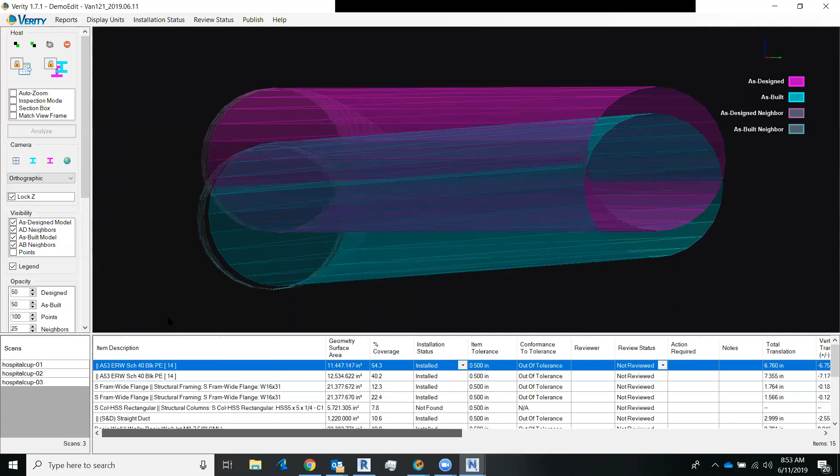So coming back to kind of the now what, a couple of the little highlights I'll talk about as far as the QA/QC process goes. Well, actually, let me go ahead and let's talk about those heat maps. So inside of Verity, there's 3 different heat maps that we have. So the main one that I want to show today is going to be this as-built heat map right here. You can see there's a color scale over on the right.

Green is good. Yellow and red are points that are too far away from the element. Blue is points that are too close. And that allows me to, again, see any of these deviations, like right here, this big splotch of yellow in the center. That's a sag in my pipe. And so I'm pretty much going to go through it. I'm going to be checking my various little deviations, making sure either things are in tolerance or out of tolerance. When I'm satisfied with the results, I can accept the status.

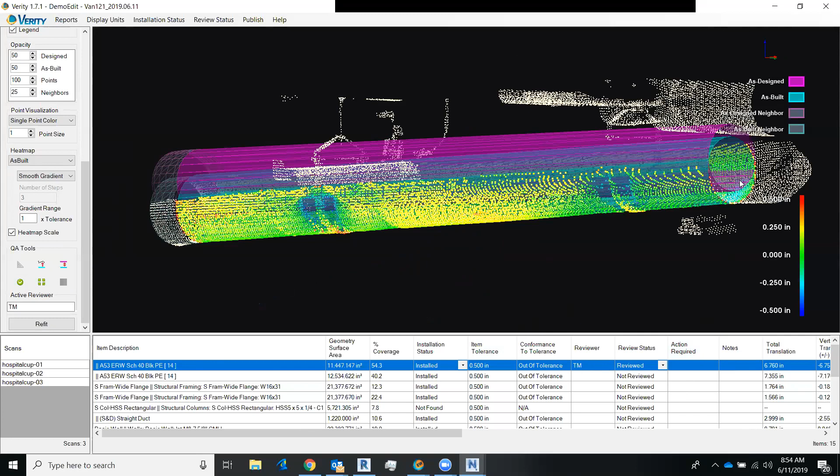That'll put my initials as the reviewer and update the review status. And I also have a notes and action required field. Those are just 2 text fields where I can input any information that I want. So after going through doing my QA/QC checks, I then want to talk about pushing over my metrics from Verity into Navisworks.

If I open up Navis, specifically the properties for this element, you'll see I have a Verity tab. So what I can do is I can push all the metrics over for the elements of my analysis, and as part of that, it'll color code the elements according to their conformance to the tolerance value. The big one is if you watch this element right here, I can shift it over from the as-design position to the as-built condition that Verity found.

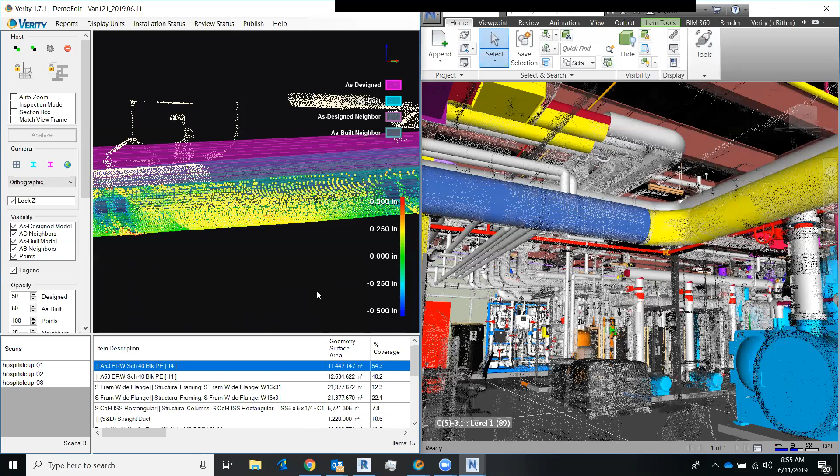I can either do that one at a time, or at the click of a button, I can do that for all the elements in my analysis. This was about 15 elements, but if you can imagine for about 1,500 elements, this is the way I can convert my design model to an as-built model at the click of a button inside of Navisworks.

Lastly, let's go ahead and talk about the reports. So for that, there's two main ones I want to focus on. One of them is going to be the HTML. So HTML offers a nice, light little solution, in that the HTML file is only about a meg or two. Also, anyone with an internet browser can go ahead and open that file.

So a common tactic is I can go ahead, email my results back into the field, and then someone with an iPad can double check my results there. And we'll go ahead and open that up real quick. So here's an example of the HTML report.

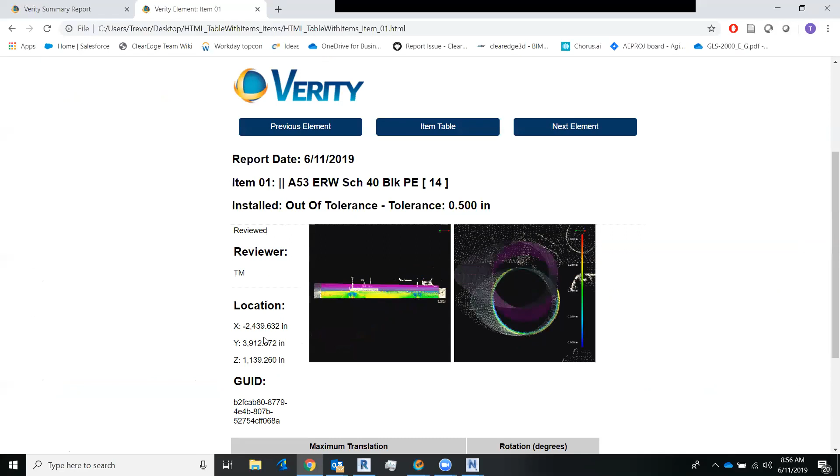I have my overall summary table, as well as these links where I can click on my individual items. I have these split views to see the element, as well as all the metrics, notes, action required, all that would be there. Again, a full comprehensive report on this element that I can then browse through at my leisure.

Also, you can export out the point cloud data from Verity through the Smart Points export. This is how I can export out my heat maps and then bring those back into, say, Navisworks, or take that a step further and bring that into, say, my Revit as a ReCap project.

And lastly, we have this Publish tab right here. So that Publish tab contains our integration with BIM 360 Field, BIMTrack, and Procore. So if you're using any of those project management softwares, you can take the Verity reports, push that as issues into that, and that way everything can be controlled and managed in one central location. And that is the Verity software, and that kind of concludes the EdgeWise or the ClearEdge 3D product demo.

Okay, thank you, Trevor. Great job.

For all you attending and saw what the power of Verity is, I just want to say that there's a very, very quick payback with the Verity software. Imagine if you've got a construction project, and construction projects are not cheap. They're very costly. They're in the millions or hundreds of millions of dollars, some of these projects. If you could find errors a week or 2 weeks or 3 weeks sooner than they're located in the field, could you imagine the big payback in terms of man-hour savings, in terms of fabrication savings, in terms of installation savings?

The worst thing is if you get an item there, you want to install it, and the pipe is 50 millimeters off, then you got a real problem. Then you got to go back to the fabricator, or you got to do field adjustments. So Verity actually helps keep your project on schedule and actually saves you quite a bit of funds.

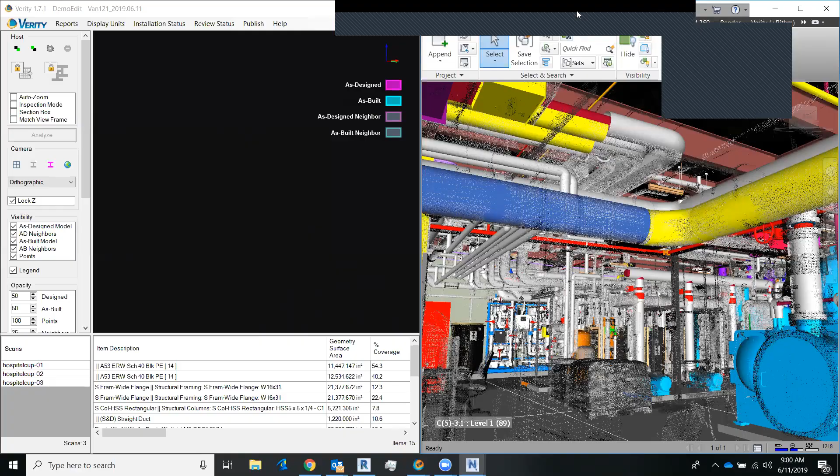Yes, indeed. Thanks, Gillian. Look, really, really exciting. I think we can clearly see why using ClearEdge would give you a competitive advantage.